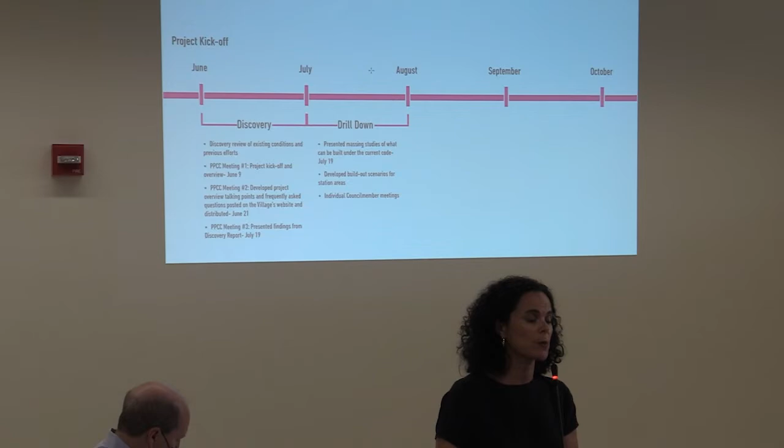Our second meeting, we talked about the project itself and the project messaging. We went through the talking points about the project and frequently asked questions. All of that information is on the Village's website and has been disseminated, so you can get all the information you want about what we're doing, why we're doing it, and the history of the project.

The third meeting, which was July 19th, we presented the findings of the discovery report - information about the work we've done, the existing conditions analysis. We looked at some case studies, good examples and bad examples, and did an analysis of what you can build under the current code. We want everybody to understand the limitations right now with the code as a baseline for additional things we can do, as a jumping off point for where we'd like to go.

We started with the drill down, which is when we actually get into the analysis and details of what we'd like to do, some of the recommendations of testing. So here, these build out scenarios are starting to get down into the details of what you would do if you could play around with different things - the open space, the building massing, the articulation - looking at the case studies and understanding the existing conditions we started with.

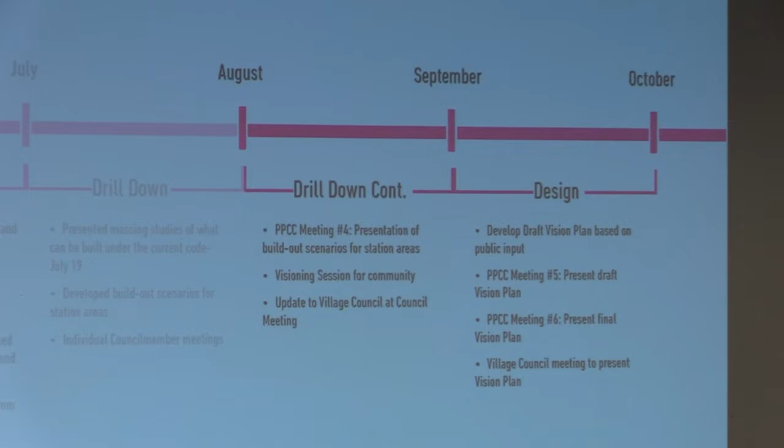If you go to the next slide, we will be presenting our findings to council as an update. We have two additional meetings with the Pinecrest Parkway Citizens Committee following the visioning session - just kind of a check-in on what we learned and where we want to go, the direction. Then we'll be developing an actual draft document of the update to your Pinecrest Parkway Vision Plan, which will go through a draft review and then a final presentation to council.

So all of these meetings are open to the public. It's an opportunity for you to listen and provide input. The presentation is made to the Citizens Committee, and they're directing and guiding us, providing critique and input on a lot of the specificity of what we're doing. Ultimately, it will be their role to recommend the final product to the council for approval.

Oh, I forgot this. Sorry.

The one other thing I wanted to say is that we started looking at overall themes, things that have come up in all of the meetings, some of our meetings with council members, in our discussions with the community. This is going to start to frame how we do the vision plan and the ideas we want to promote. These are things we can talk about at the visioning session as well, and get your input on.

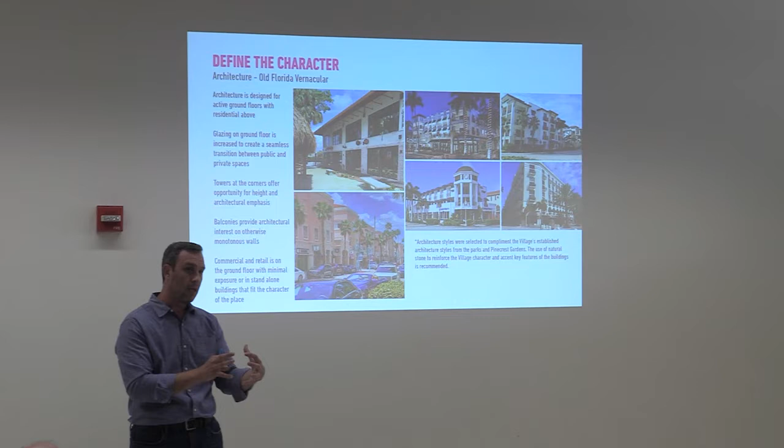Balconies provide architectural interest instead of just a monolithic wall. So that conversation is more about how do we start to break down the box. Step backs, awnings, balconies, those architectural features, similar to this image, really start to make that mass feel smaller, give it some character, and bring the scale down, right? Those are all good things that we like to do from a design world to add interest.

And then again, commercial retail on the ground floor with minimal exposure or in standalone buildings, and it fits into the character of the space. So we're trying to create a critical mass there, that village scale, that village feel with the massive architecture.

And so these are some of the examples that we have. Some of them, again, are commercial on the first floor, residential on top. This building over here is predominantly residential. Again, commercial on the first floor, residential on top. We're also mindful of how many stories or floors we're showing, and we'll get into that a little more, is it 4, is it 5, is it 6, what feels right?

The next, we grouped the Key West and the Mediterranean together. And again, similar to the previous slide, there's a lot of great attributes about this architectural style as well. You can see this in a lot of the architecture in the residential homes throughout the community, so it makes a lot of sense.

And again, there's a lot of great detailing. There's balconies, large overhangs that create shade to promote or maximize outdoor use. Again, large window openings on the ground floor, so as people are walking through developments, they're doing what our grandparents used to do, a lot of storefront watching, looking through the windows, seeing what's in the store, creating a lot of activity.

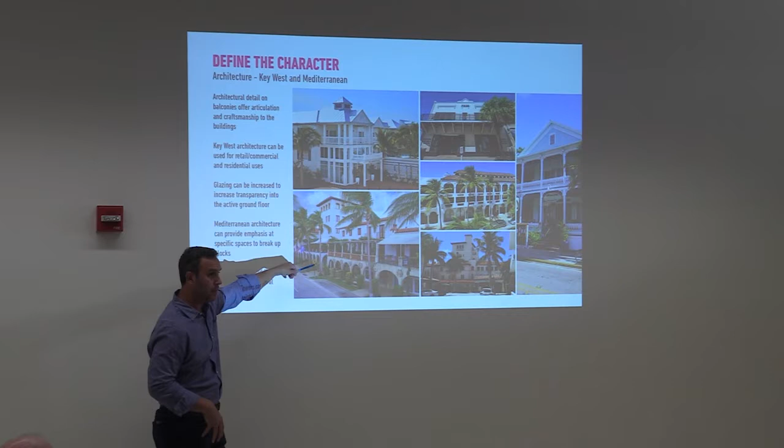And then again, introducing the colonnades, balconies. There's a lot of richness in this photo that this Mediterranean style has, that provides a lot of comfort, a lot of interest, a lot of architectural style and scale to the development.

And then the other idea is, do we want to go with something that's more contemporary? And does that fit? Would that be something that fits with what the community wants as a brand to separate itself from other communities?

And here are some great examples of, from a contemporary sense, a very contemporary facade, contemporary outdoor spaces, and the use of outdoor art to really ground the whole development and define it. There's some really interesting forms, shapes, and materials that come along with contemporary modern design that maybe some of the traditional ones don't have.

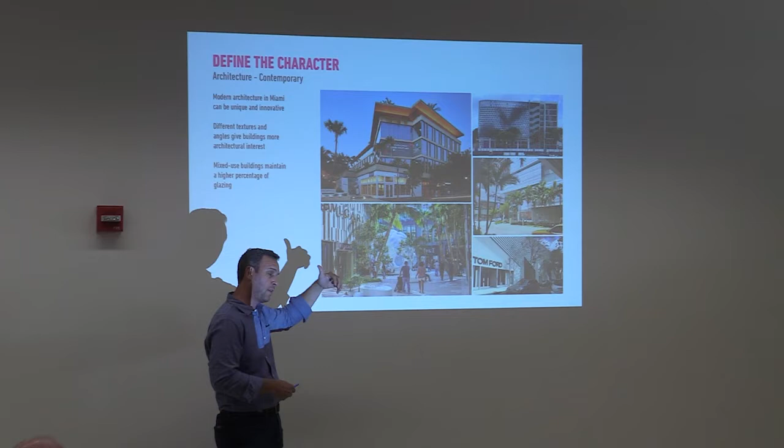And then we start talking about open space. One thing we really want to make sure is that we have meaningful open space, spaces where people can come together. And you'll see in a future slide how we can redefine what open space is. In some zoning text, open space is as simple as a grass strip that's maybe 5 feet wide by 10 feet wide. What value is that really giving you?

Is there a way that we can redefine that, consolidate that, to have more meaningful open spaces, the chance to have more large tree canopy? There's a lot of character in this community, a lot of great oaks. There's an opportunity to really lean into that and create spaces centered around that. Having great streetscapes where there's more green, really invites people to walk the streets and connect.

Park spaces with ample shade give people opportunities to rest and sit out, even on a hot day like today. In shaded areas, you can be 5 to 10 degrees cooler. It would be nice to get people out there.

Placemaking and art add a lot to the character of open spaces. It can be whimsical or more traditional, it doesn't matter. The introduction of art as a placemaking opportunity is really successful and something we need to promote more.

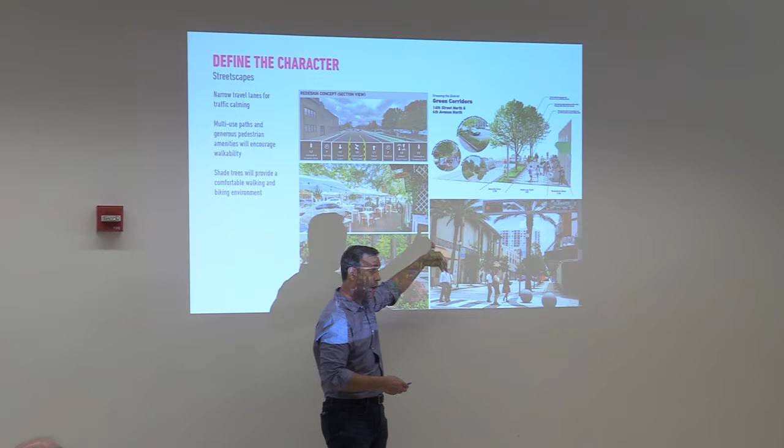These are some examples we've done—different widths of street, on-street parking, bioswales to help collect water and manage stormwater. There's a lot we can do with these streets as we define what they are, adding value to the community and to development.

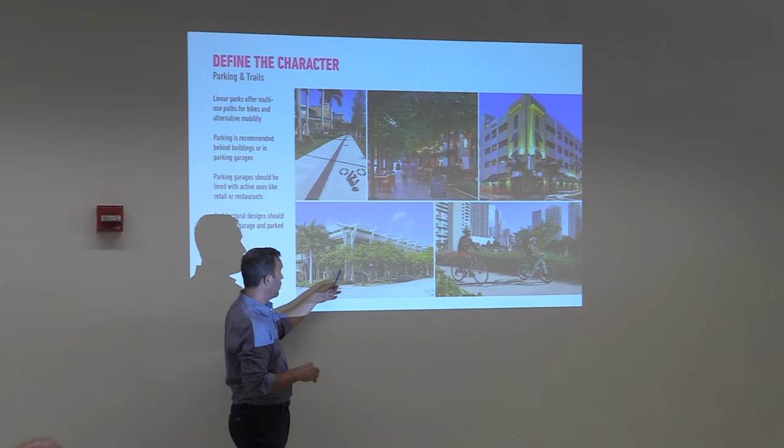Parking and trails—this is another way people can use multimodal transportation to get here instead of relying just on cars. And if they do drive, making sure parking facilities are where they need to be and can serve the community and development.

From a parking garage standpoint, you'll see two examples here. This first one, in Naples I believe, uses more greenery to screen and make the garage structure more attractive. That's very successful—we've seen that a lot.

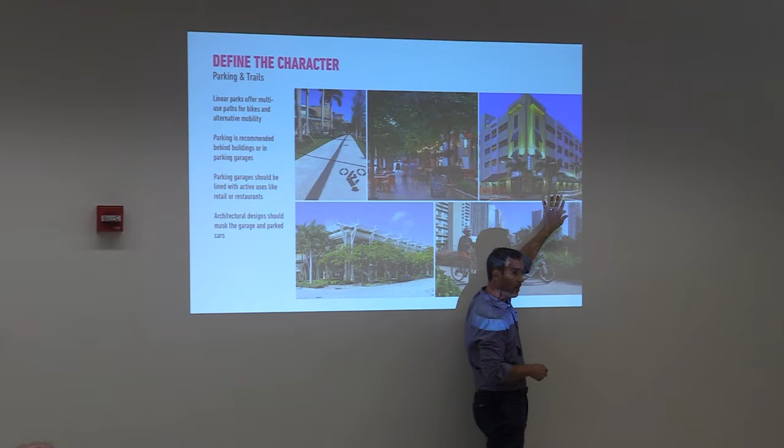The other example is where we either put a liner on the first floor with some retail and commercial, or skin it with residential in front, to minimize the appearance of that parking structure. There are a couple tricks to integrate parking into the corridor to make it much more serviceable for everybody.

Lastly, we look at some of these bike trails—this type of scale I can see happening along US 1, a little bit wider to promote more biking along that corridor. It's not a very attractive pedestrian space today, but we have a very generous buffer along that corridor we can take advantage of.

We can add more green in there and make wider pathways to promote a longer commute for people who want to run, bike, or walk. Likewise, on the backside, closer to residential, we can shrink that down in scale and add more landscape, providing another avenue for people to be connected, but at a different scale since it's adjacent to residential.

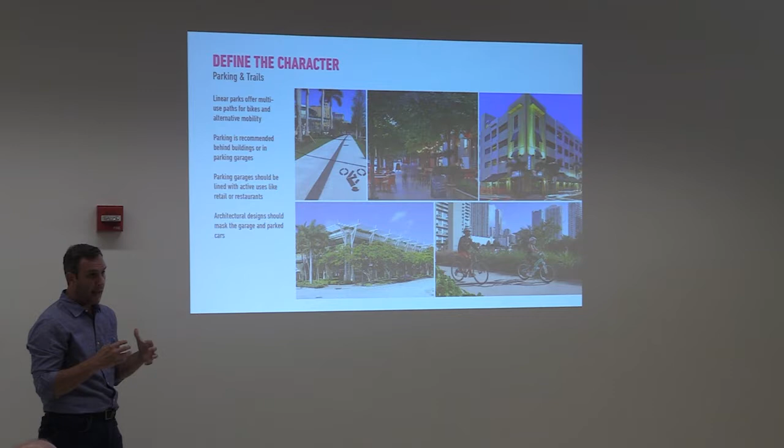And I mentioned the streetscapes again—trying to really take advantage of those spaces and maximize their value as public spaces: seating opportunities, art opportunities, placemaking opportunities, signage and wayfinding, lighting. There's a lot that happens within that environment, so how can we really leverage that to make it much more impactful?

So the next thing we have, and again this was talked about a lot at the last meeting as a lead into this. Currently, the way the code is written, the max FAR you're allowed to have, that's floor area ratio, is 0.73. What our charge is, because of what the county is doing, they want us to look at a minimum of 1.0 FAR. So what does that mean? How do we get there? What would that look like? These next few slides look at what works in your current text today that we don't need to change, and what do we need to consider to allow for that to happen and still be successful with quality high-end development?

Okay, can we have a discussion on the characteristic that we finished? I would like, if we could, because this is a continuation of the last 3 meetings. Yes, they've had this bottled up for a little bit, so let's let them have the opportunity.

No problem, and I think this is going to answer a lot of questions that came up last meeting about FAR and that delta between 0.73 and 1. Because I think the characteristic is very important. But we're going to get to that. I think everyone's concern is density and the FAR. What's the effect of going to the minimum of 1.0 FAR?

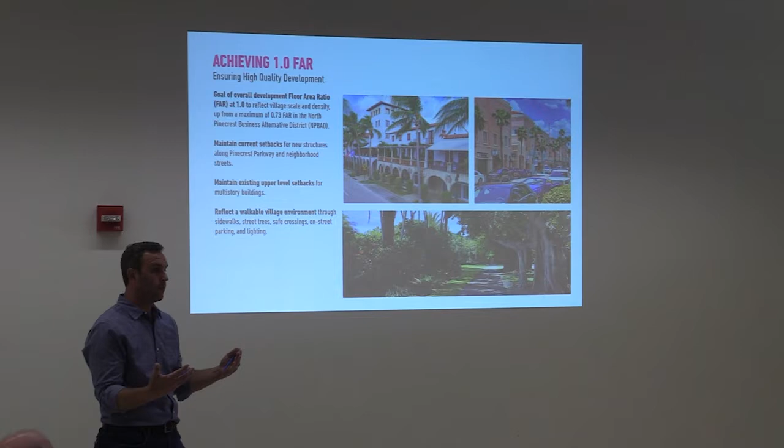May I ask, I'm sorry I wasn't here for the last meeting, I apologize if it was said, but achieving 1.0 from 0.73, whatever it is, does that count the whole village or just the commercial?

It's only the FAR 1. It's only what we're looking at right now are the development districts, so we're looking at South Dadeland right now, 104th and 136th. The 1.0 FAR does not include residential. Residential is excluded from that. The county ordinance asks for a 1.0 FAR basically for the first quarter mile from the transit way, which includes all of our commercial properties. It's the commercial corridor, not anything east of the route.

Okay, one more question. Let me, because we've had a couple board members that aren't here, could you maybe just review for us the transition that exists between US 1 on the front side and the FAR, and on the back side the FAR is less? Just for a moment, it doesn't have to be very detailed.

So based on the county's overlay that they're proposing, at the intersection of US 1 and 136, they would like to see a requirement of 1.5 FAR around the station, stepping down to 0.5. That's within a quarter mile, right? The rest of the corridor, along US 1, there is a 1.0 FAR within the first quarter mile.

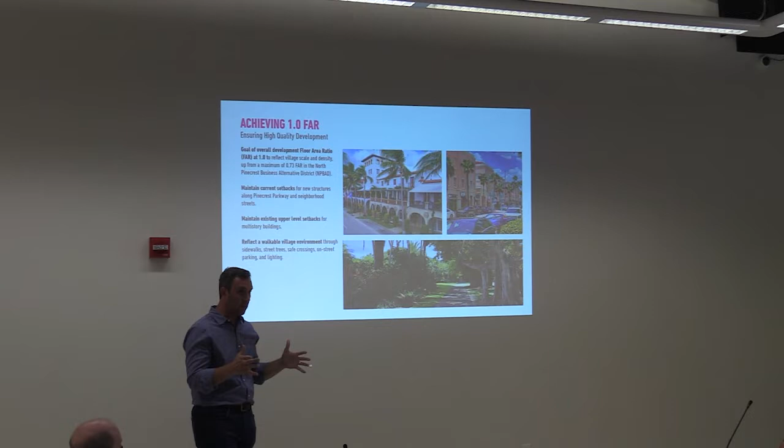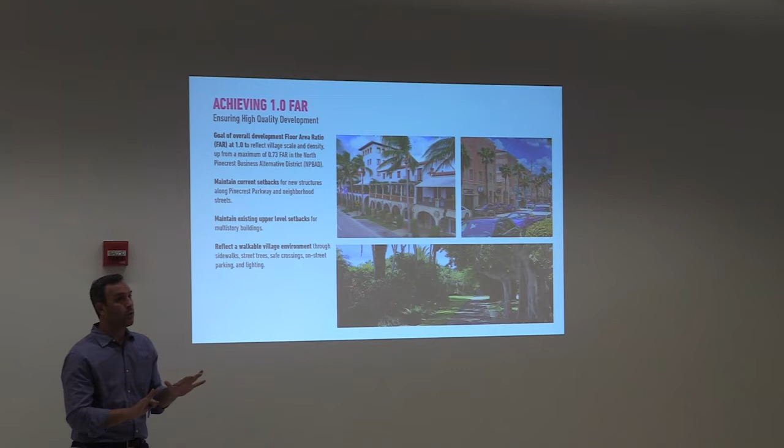In our analysis, when we studied the existing conditions compared to what you see over here on the easels, it was our determination from the existing text that some things do not need to change. The first one being maintain the current setbacks - there's a very clear definition of what the different setbacks off of US 1, side streets, or adjacent residential. None of that needs to change. Those are more than adequate to still have a viable development site.

So we're maintaining those. The second thing we saw is maintaining the existing upper level setbacks - there's language about when you go up to a second floor, you have to step back X feet. You don't need to change that; in fact, we're recommending that you continue that forward. That's good because it helps break down the scale, and it helps make that transition where you have a building that's 2 or 3 stories adjacent to residential, whether multi-family or single family, minimize the visual impact of that.

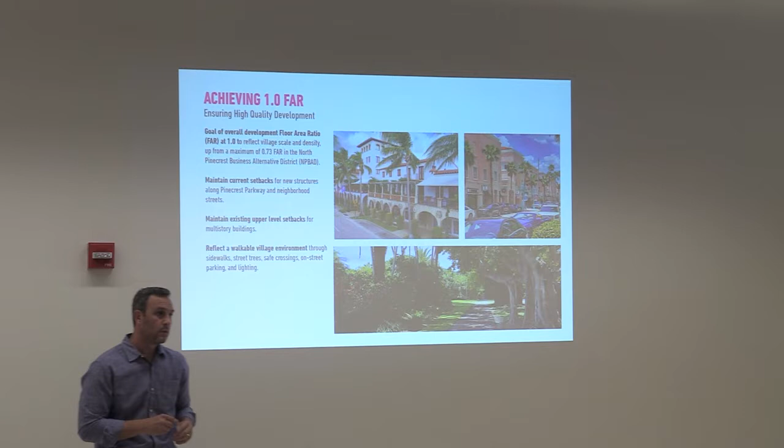The other thing your text really is promoting is a walkable village environment, and in fact we're looking to enhance this even more so. We're maintaining this and actually building upon that, making the connectivity easier for walkability, biking, and other modes of transportation, so that we're continuing that forward. That does not change.

Now, what does change, or what we think would help make this development more successful—again, we're looking to maintain a high quality standard, but still achieve that 1.0. So the first thing, again, I touched on this earlier, is...

Redefining or making more clear the definition of what meaningful green space is. I think that's really important. Right now, there's a range of 10, 12, 14% of open space, depending on how it's classified. Beyond that, it doesn't stipulate what type of green space that wants to be. So one of the things we're looking at is reflecting high quality and meaningful open spaces—plazas, pocket parks, landscape buffers, those sorts of things. Put those in there, require those types of open space uses.

The other thing we're looking to propose is more mixed use. Right now, there's very limited amount of mixed use they can have. So what we mean by that is commercial retail on the first floor, office or retail on the second floor, so on and so forth, so you get a little bit more mixed use within a building footprint.

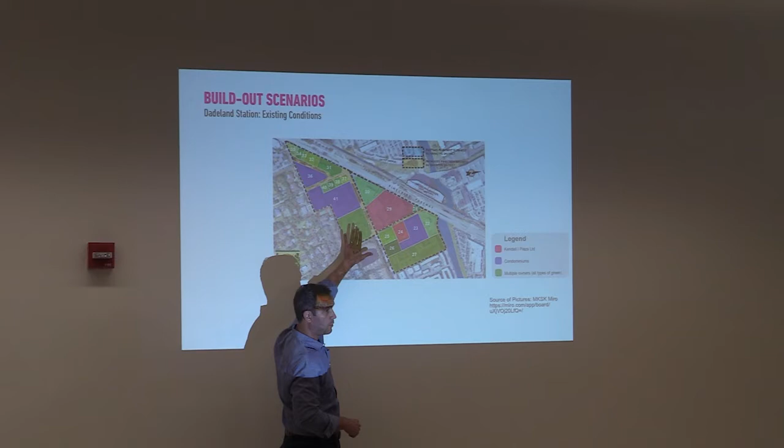So here's an ownership diagram. The orientation has changed, north is to the right. You can see the different owners, condominiums and multiple owners. We stayed away from condominiums and multiple owners because there would be difficulty acquiring that land. For this exercise, we wanted to focus on what would be more plausible for acquiring and consolidating ownership to do these developments, so we excluded anything with multiple ownership.

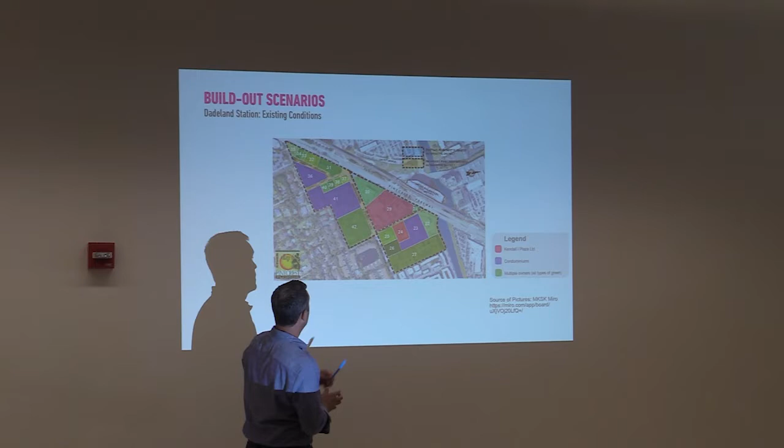Excuse me, to clarify, when you say multiple owners, like number 42, that's not one owner, there's many more in there? Yes. So you don't know how many owners? Each square is a different ownership. 42 looks like some kind of residential or office piece, but is it one owner? That piece of land is one ownership, 42 is one owner. So all the boxes that are green are one owner? No... yeah.

41, 42, 27, 25, and 26, those are all residential. 25 and 26, from what we can determine from the auditor's webpage, those are apartments, so they're owned by a single owner but the tenants do not own them. Whereas 27, 42, 41, and 36 are all multifamily with multiple owners, so it could be a corporation or real estate investment trust, but it's not a condominium, it's not owned by an individual. So there's multiple owners in there, right?

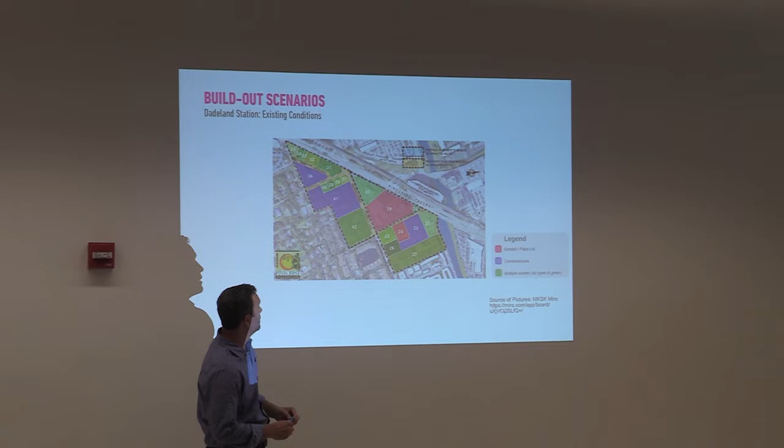Excuse me, but they need to include specifically the exact street number, for example 67th Avenue, and it's not on that chart, so I'm trying to figure out, is this all east of the highway? Yes, US 1, we're east of that. Like 42, what street is that, for example? That's on Kendall Drive. Yeah, Kendall and 68th, yeah. We need to include the specific street. We can have those.

Can you point out the CVS? That might help. CVS is right here with 30. You want to go back to the next slide? So I apologize, we're changing the orientation on this, but orientation is due north. So here's Pinecrest Parkway, here's 88 right here, CVS is right at that corner.

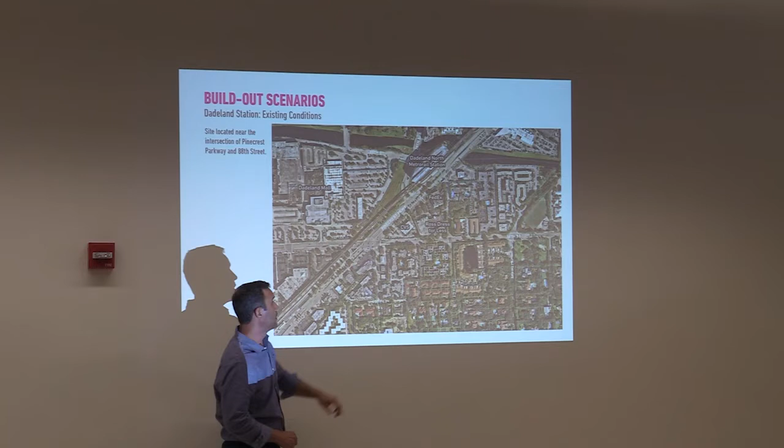So that's number 42, the green one you're talking about? Go to the next slide. No, 30, yeah. So CVS, 42 is right there. 41 is right here, 42, yeah, right there. 30, 36, 41, 42, 25, 26, 27. Point out 88. 88, and then 68th Avenue is the one in the way.

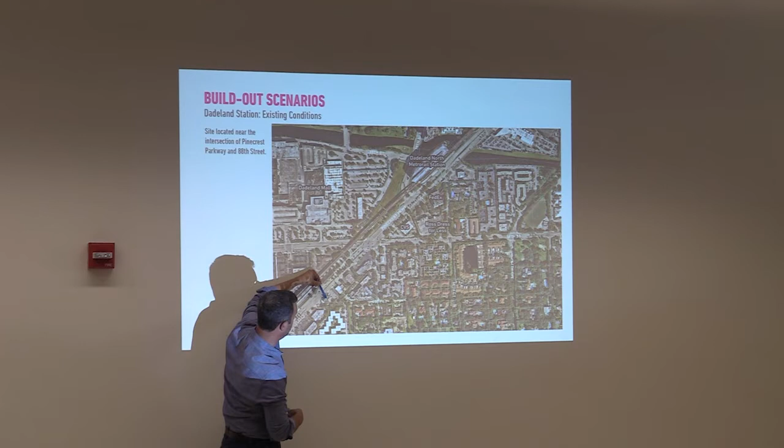Are you sure the existing commercial area is not... this is existing condition. Can you delineate, can you show with your finger where the actual commercial areas are located? Yes, commercial is primarily in this triangle here. There's commercial obviously along the parkway, and there's some commercial in this zone right here.

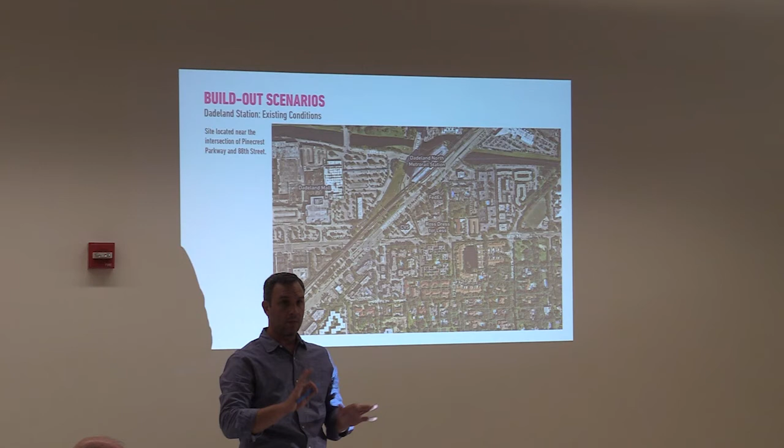Multifamily, multifamily, multifamily, apartments, multifamily. So what is that, you're gonna do away with all these? No, just to be clear. We all know all this. Why are you talking about everything that we already know? Those requirements that it says, because they want to increase the density. You want to show little boxes with it being green? Are you talking about ripping down?

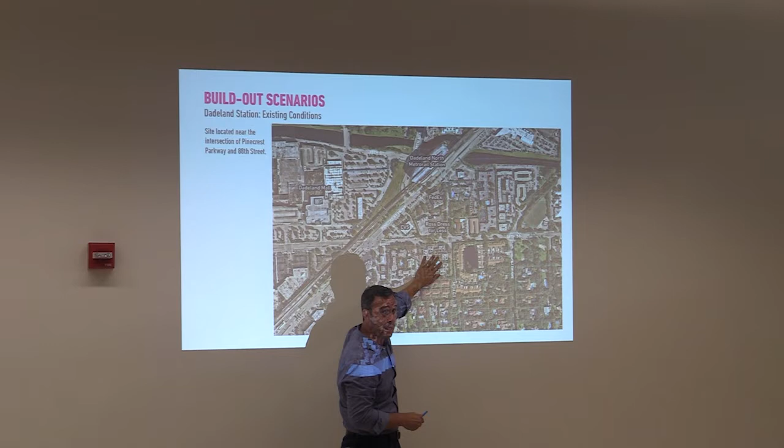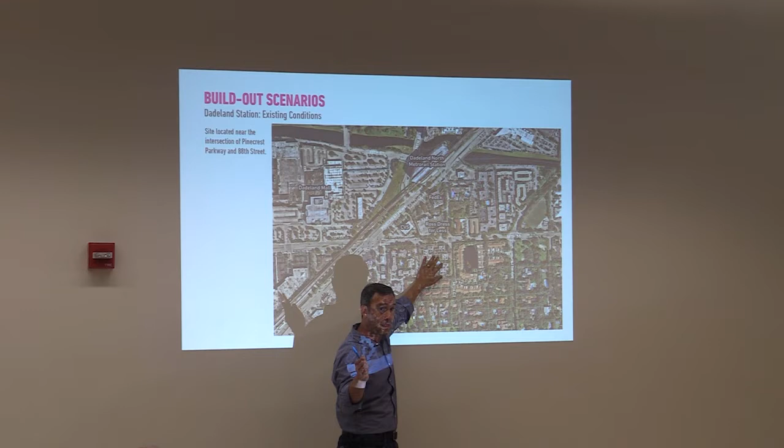No, sir, no. So we're showing those ownership maps, and one thing we're teasing out or looking at to verify is the limits of what these districts want to be. Currently, the way the current vision plan has it, it includes the multifamily development in that boundary. We are proposing not to touch those multifamily and focus solely on the commercial for the purposes of this study. We're not proposing to tear anybody's house down or residential, we're not proposing any of that.

Can I add something? All of this property is privately owned, and every property owner has certain rights as provided within the zoning code of the Village of Pinecrest. So if it's zoned commercial, you go to the commercial zoning district. The land development regulations tell you exactly what uses are permitted, what heights are permitted, what setbacks are required, how many parking spaces are required, and those owners enjoy those rights, nobody's going to interfere with them. What we would propose is to allow, if an owner wants to come along and redevelop in the future according to a plan approved by the Village of Pinecrest, that could be permitted if the plan is put into place for that.

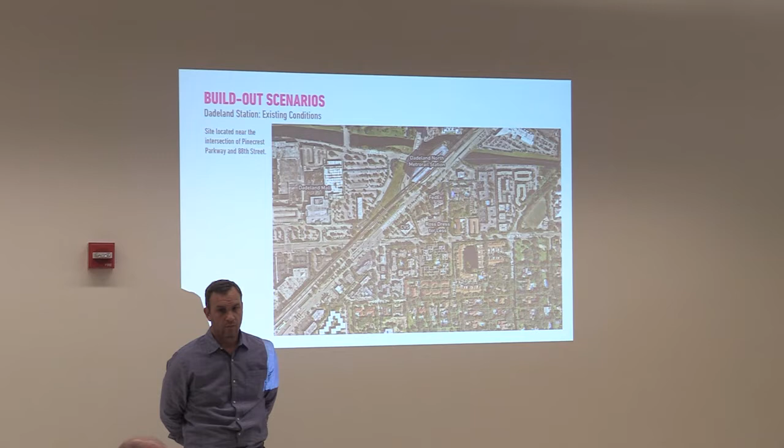We're not talking about taking anybody's property or redeveloping any property at all. That's privately owned property, and a property owner has the right to develop according to existing zoning and any changes that are implemented in the future.

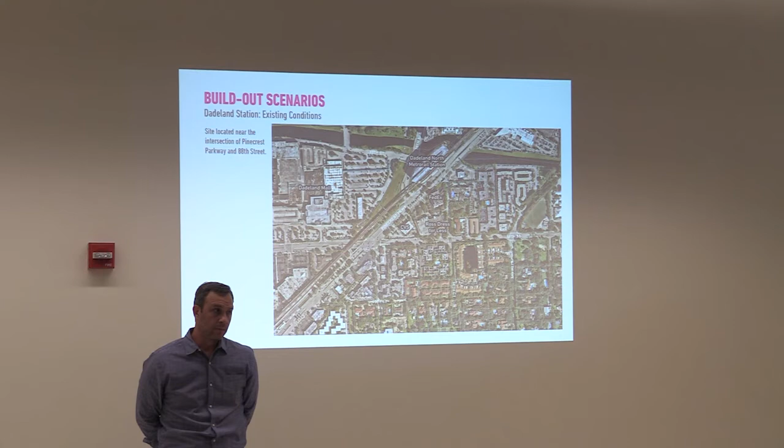So these are just study areas. Yes.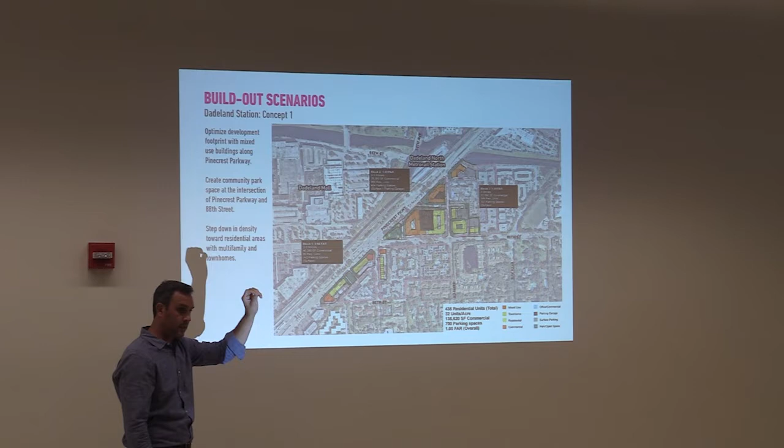As we look at that, the first plan, first scenario we want to share with you, again, is how to achieve a 1.0 FAR on the commercial property only. It's faint, I apologize, the board's a little bit clearer, but there's a pink line that represents what the vision plan currently calls out for this district. Again, our focus is on the commercial, not the multifamily, not any of the residential.

So what we're looking at with this development is open space, architectural massing, introducing street hierarchy - what could we do if a developer came in and acquired all these parcels and consolidated them? If someone came in here and consolidated all those commercial properties, what could they do? Likewise along Pinecrest Parkway. Again, we're not proposing that this is what's happening, but this is how we're able to test these solutions. Overall, this plan represents 435 residential units.

It has 135,000 square feet of commercial, 700 parking spaces split between surface and structure, and it achieves an overall FAR of 1.0. Here's how that translates to the 3 different blocks.

In block number 1, which is along the parkway and includes these townhomes, we're at 0.94 FAR, slightly lower than 1.0. Max stories we're looking at is 2 to 3 stories, with a total of 40,000 square feet of commercial, 80 residential units, and 142 parking spaces, all accomplished on the surface.

Why 2 or 3 stories? Because of the area we have with the open space requirements and achieving that 1.0 FAR. That 1.0 FAR is what's locking us in - it's what's determining what we can and can't do. That's why we're limited to 1 to 2 to 3 stories.

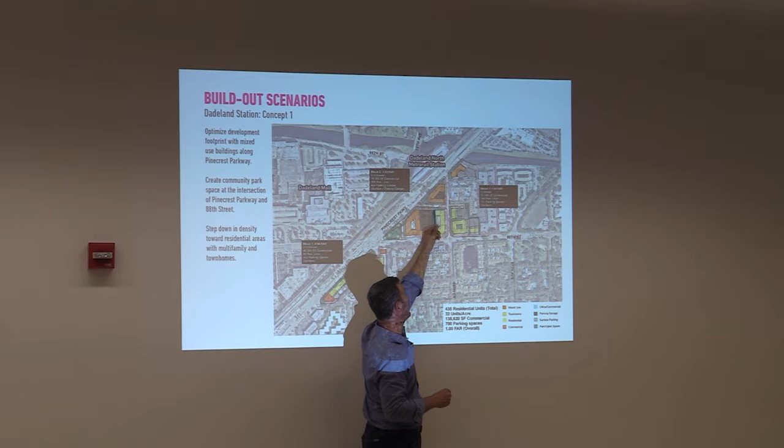Moving forward, block number 2 is the larger block where there's opportunity to do more. We're looking to introduce more district level streets, improve connectivity, and introduce more green space. This green space is fronted on US 1, at the corner of US 1 and 88, to make that a possible gateway as you drive in from the community from the north.

We have a mixed use building here, shown in orange, with residential in the back, serviced by a parking structure. On the north side, we have another mixed use building that has 1 level of subsurface parking and then a modest structure above that. We also have at the very top a mixed use building with surface parking.

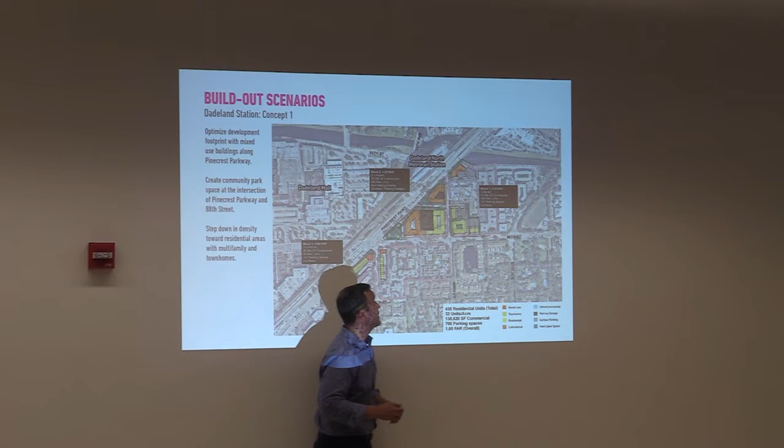For block 3, we're at 1.0 FAR, 3 stories max, with 17,000 square feet of commercial, 149 residential units, and 137 parking spaces, all achieved on the surface.

Matt, currently, if you go back, so when you describe the dwellings per acre, at each one of those, what is the current allowable dwellings per acre?

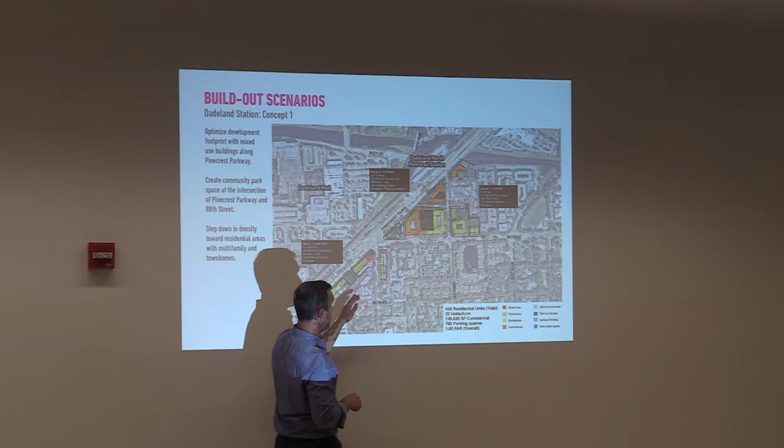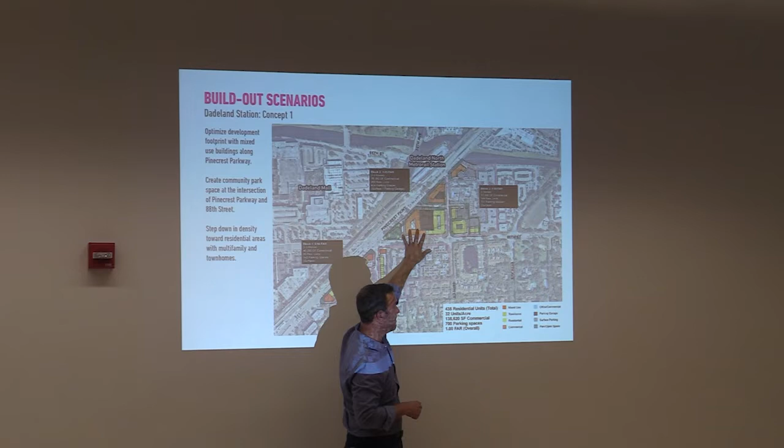So right now, from a residential standpoint, the areas we're looking at, there's only residential on this corner, and it's relatively low. What we're proposing is increasing the density, because there's not residential there currently, but it is less density than what the existing surrounding context is. So while it's being increased, we're not maximizing it, it's slightly lower than that.

So that little square over there you pointed to, that's residential now, the yellow square? You're saying it's zoned commercial, but happens to be residential now? It's residential right now, I believe it's apartments at this point in time.

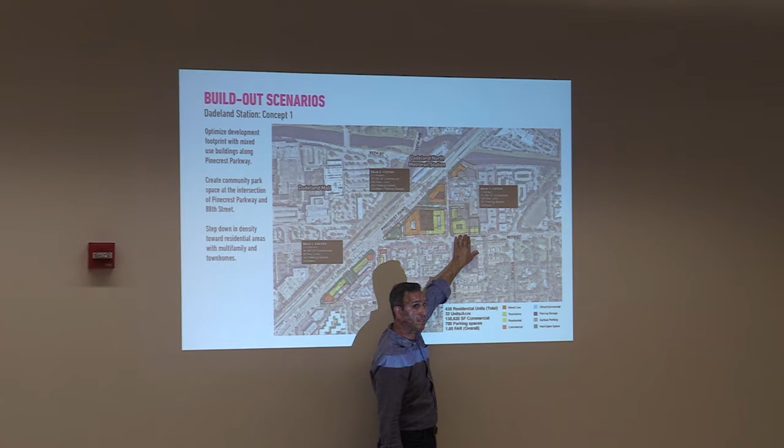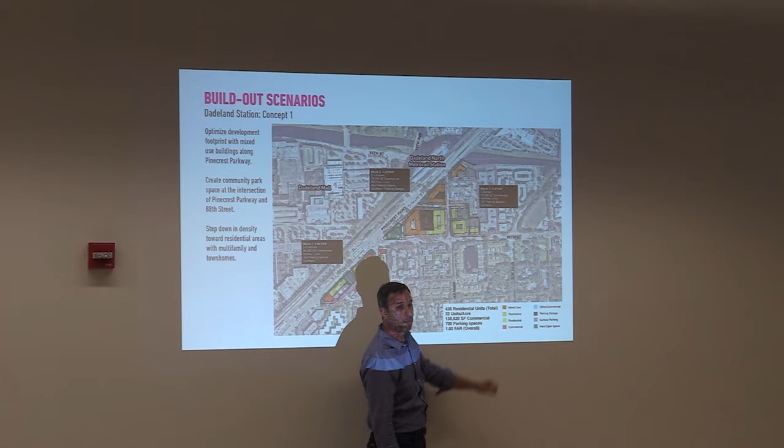Right, but I thought you said you're excluding residential. Yes, we decided to keep this one in there. Sorry for the confusion. We decided to add this because it was a single owner, and if there's an opportunity to maximize or optimize the development to create a better space, that's why we looked at it.

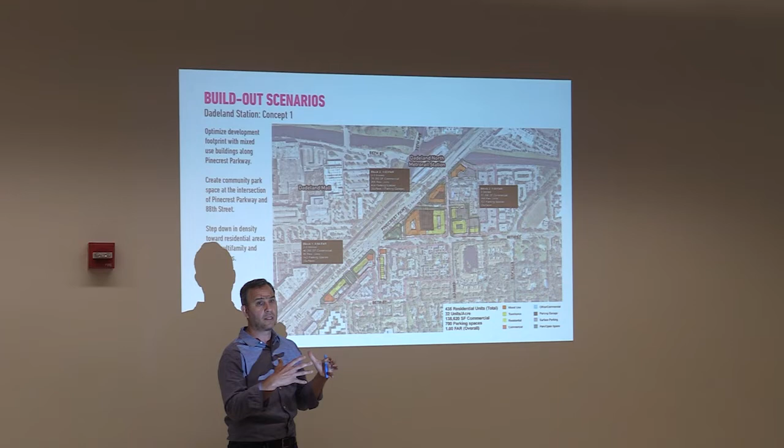So if it's residential, can we lock it in as residential, not meet the 1.0 FAR? Why do we have to change that? You're saying you're making us do commercial to exclude residential? We can absolutely exclude that. This was us taking a look at trying to create as much of a holistic development community center as possible. That can be excluded, we can take that out and focus again on block 2 and block 1.

Again, this is us teasing out different scenarios. Well, I understand that, but what I'm concerned about is that if you add it in, it becomes an option in the future to be changed. Meaning, when you say you're excluding it, I understand that's for your purposes of looking at things now, but what I'm trying to say is, if it's possible for someone to come in and knock it down and put it commercial, is that possible now?

No. Okay, so then we should just move on from the group, right? Then we should lock it in.

I appreciate that, to be clear that you're proposing to increase the density on that particular residential unit. In case in the future that one owner would like to knock it down, he has the ability to build more units where fewer units are currently there. I think that's the question.

We're not proposing that. You're not proposing to increase the density on that? We're not proposing that. We're, in some ways, looking at the worst case scenario, what could someone do, and we're trying to find that balance. But that's the question, I mean, they have the right to do that, mostly. No. And why are we doing it?

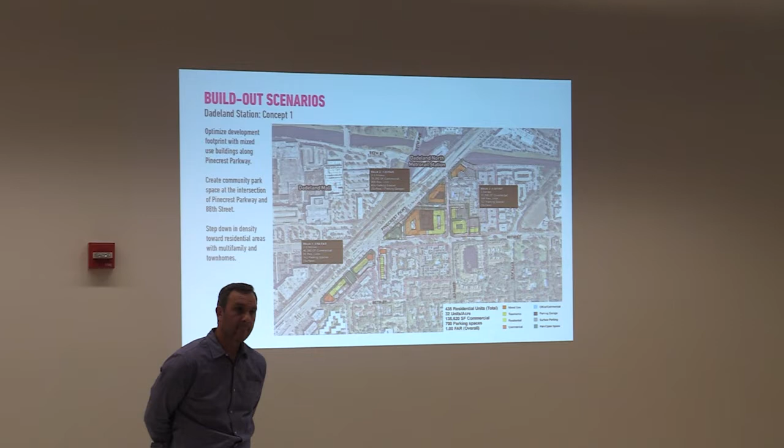From a real simple standpoint, I think the one big concern this community has is density. They're concerned about density. Why don't you talk about the main issue, and then we can talk about everything else under the sun. But let's get to the density issue.

I heard you say a minimum of 1.0 FAR, minimum, and I heard our zoning director say 1.0 maximum. Please define if it's minimum or maximum, and if it's minimum, what is the maximum? Can we go to 10.0?

So let's clarify that. Steve, can I answer for you? Yeah. The Miami-Dade County minimum is 1.0. The Pinecrest maximum is 1.0. I don't know why that is confusing.

We're talking about the county, we're talking about the city, because the county has the ability to impose on all municipalities certain things. The statement here is that the county minimum is 1.0 FAR, and Pinecrest has decided their maximum is 1.0. Well, the minimum is 1.0 in the ordinance that was passed at first reading by Miami-Dade County. Correct. Right now, the village's land development regulations allow a maximum of 0.73 if you have a 4-story building. But we don't know what the village council is going to do in the future. Presumably, they're going to have to comply with the 1.0 minimum.

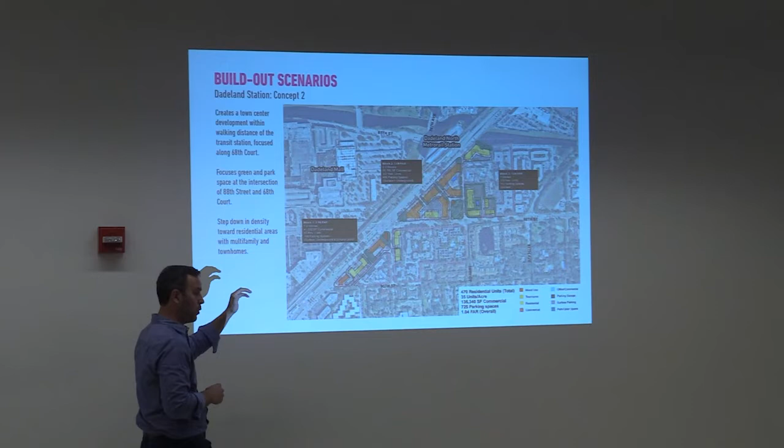Let's go ahead. So the next scenario we're going to look at, again, what does it take to get to 1.0 FAR, but what can we do from a development standpoint that is more context and village friendly, for example. So again, the biggest change that we're looking at here, 1.0 FAR, that's what this scenario is saying. Achieving the 1.0 FAR is relatively easy. Not only that, but overall the stories are relatively low: 1 to 2 stories on block 1, 2 to 3 on block 2, and again 3 stories on block 3.

The biggest thing we're looking at here is where do we want to put the open space. Do we have enough connectivity from the roads? Do we try to rearrange the building masses to make it feel more part of the context?

In this one, we're looking to introduce more meaningful open space on block 1 that could be shared by these uses, mixed use and residential. This does have underground parking associated with it, but also ground level as well. So on block 1, there's 41, almost 42,000 square feet of commercial, 93 residential units,

and 158 parking separated from surface, underground, and ground level. Block 2 is probably the biggest change, where we're taking the gateway green open space that's at the corner and moving it back to engage more with 88 and 68, so these multifamily developments have more direct access to that. We're trying to create a center here instead of a center there, and seeing how the architecture and the roadway network would respond to that.

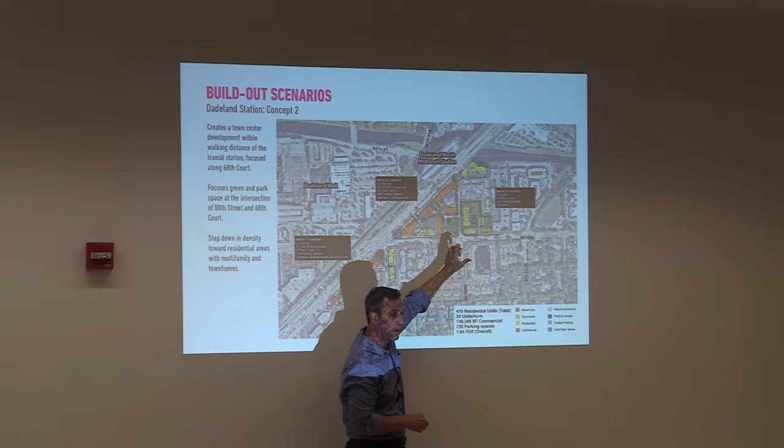Similar to concept 1, we are looking at replacing the existing apartments with townhomes and also multifamily, again a different mix to help bring some of the density down. It also helps step down more appropriately, perhaps, to the context.

Scheme 3 looks at a more inward focus as far as how we develop this with green space and open space. Again, overall we're actually slightly less than the 1.0 — we're at 0.97 on average for these 3 blocks.

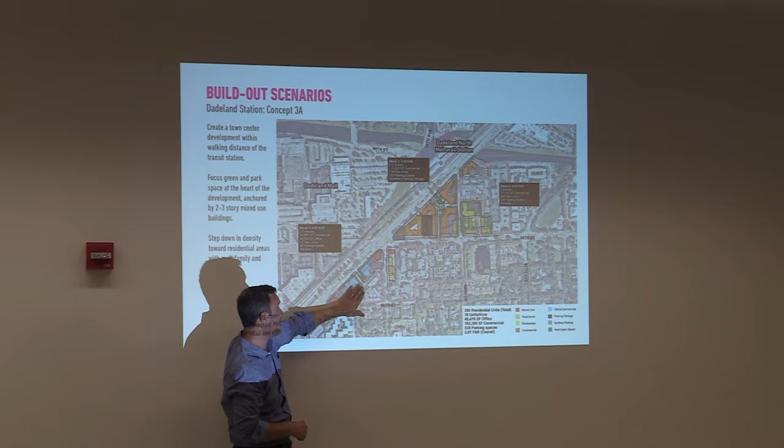With block 1, again 2 to 3 stories, 62,000 square feet of commercial, almost 50,000 square feet of office. We've introduced some office into this block — that's a change. 12 residential units and 89 parking spaces, all done on surface. In this block, we've taken out the residential that was along Pinecrest Parkway and put in office, and the residential we have here is predominantly townhome development.

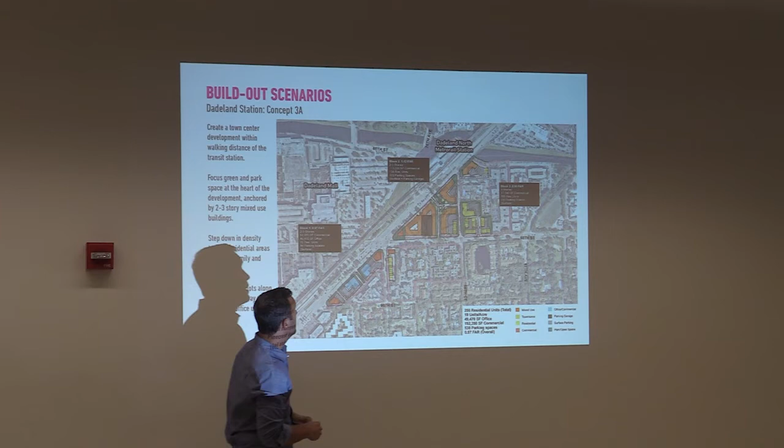On block 2, this is again 1.0 FAR, 2 to 3 stories. This block in all 3 schemes so far has been around the 2 to 3 stories height. 113,000 square feet of commercial, 136 residential units, and 320 parking spaces, again both surface and garage, with the garage located right off of 88.

Likewise, in block 3, we've introduced more townhomes, trying to be mindful of the density, trying to bring that down and have it fit a little better with the context. So 3 stories here, 17,000 square feet of commercial primarily up at the top corner, 108 residential units and 130 spaces, all achieved on surface parking.

The last one that we have, because we wanted to look at, well, what if we go higher, right? Because everything so far, especially on block 2, this is the focus. What if we go from 2 to 3 stories to 4 to 6 stories? Try to get 4, 5, 6 stories in there.

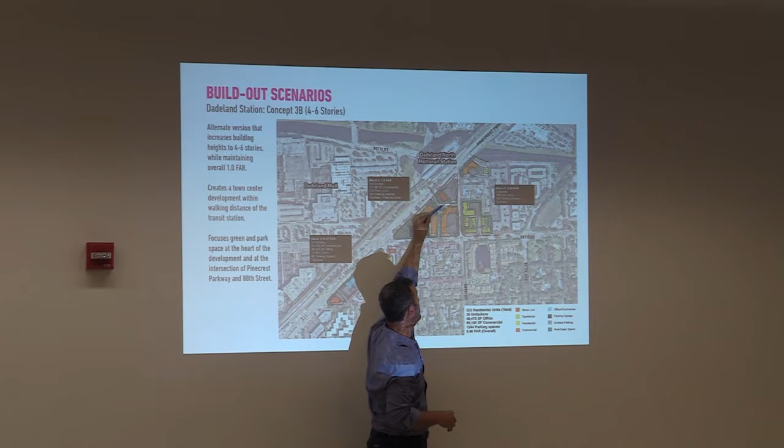As you can see, as we go higher — these are mixed use and these are standalone 1-story retail spaces — you see a lot more green. We still need a parking structure to be able to service those. We still have an internal green space with new street typologies introduced there, and a little more surface parking on the back sides of both of those.

So the big takeaway on this plan is what's the impact of going higher but still achieving that 1.0 FAR. Again, that's the trade-off, right? You can go higher, you can get a little more space in the ground plane, get a little more green, probably increase some of your buffers, but your buildings are taller.

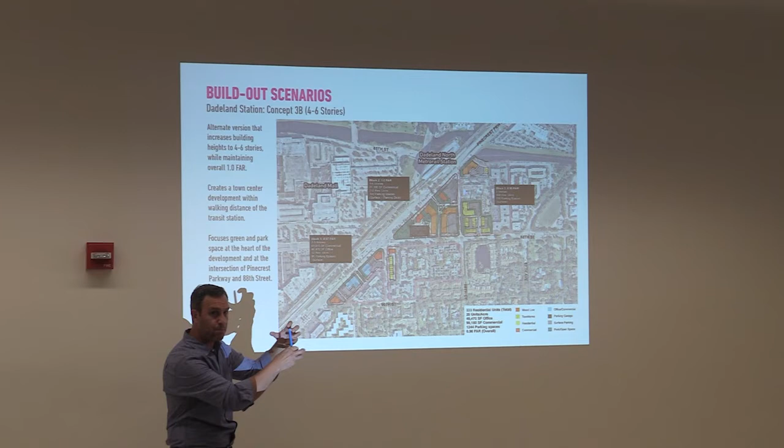So I think that's a really interesting conversation for us to tease out and understand — does that make sense? Or do we need to be more in line with the 3 previous schemes, where we're a little bit lower, have a little bit more fabric, a sense of village scale, and more spaces, that sort of thing? What's the priority?

The next piece that we're going to look at is the 104th Street station. So Pinecrest North is this way, 104th is right here, and Flagler Grove Park is right here. We're going to be looking primarily at this portion here.

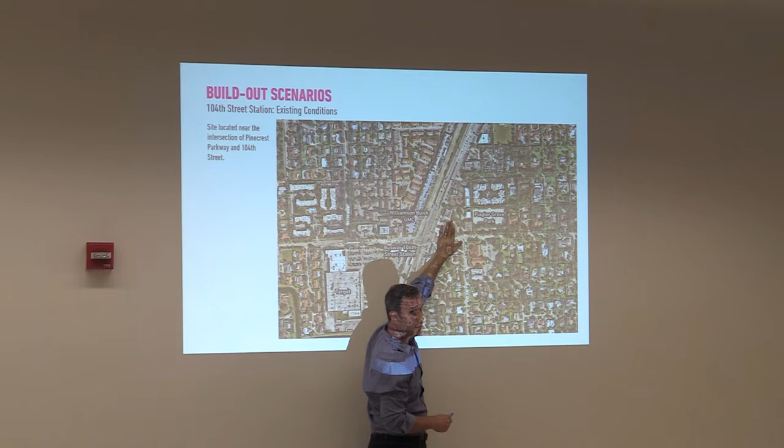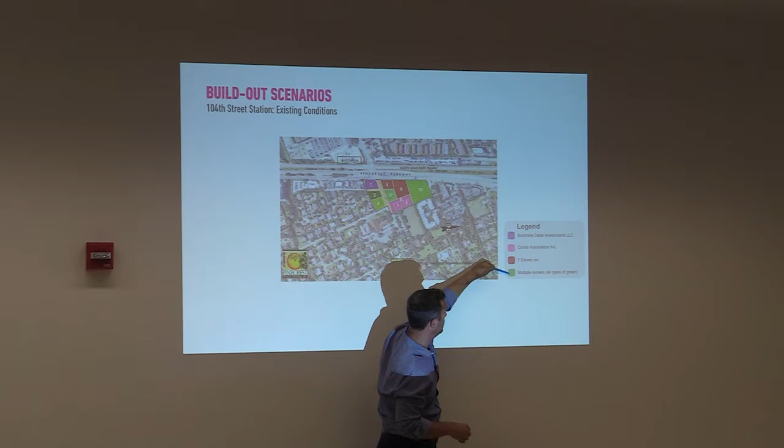Today, again, north is to the right with Pinecrest running east-west, and here's 104th. So you can see who owns these properties. There's a condo association, there's also some multiple ownership, a 7-Eleven here, and Sunshine Date Investments there.

Again, north is back to the top of the page. 104th is here. Most of what we can do is on the north side. There isn't much opportunity on the south side, just because this building looks like it's recently renovated, so it doesn't make a lot of sense to recommend any changes to that. It looks like a great renovation, but there's an opportunity to capitalize on this corner a bit more than maybe a gas station. So that is represented in block 1 here, with 2 stories, 10,000 square feet of commercial, and 18 parking spaces.

I think you need to look into that area, into that block, because I was doing some analysis there. Basically the commercial—because we need to have both healthy residential and healthy commercial—and I don't think the commercial there is surviving very well, because I think they need parking. I see an encroachment into the residential area, and I think we really need to analyze that block in more detail, because there's a need to expand the commercial area.

So this is on the south side? Right, our limits to the south are right here, as far as what our study area is. All of this is residential, but they are transitional, because the commercial area is invading into the residential area. Are you speaking of along here on the border? Right, we need to analyze it a little bit in more detail. I think you need to recommend maybe some zoning change. Okay, we can do that, we'll look at that.

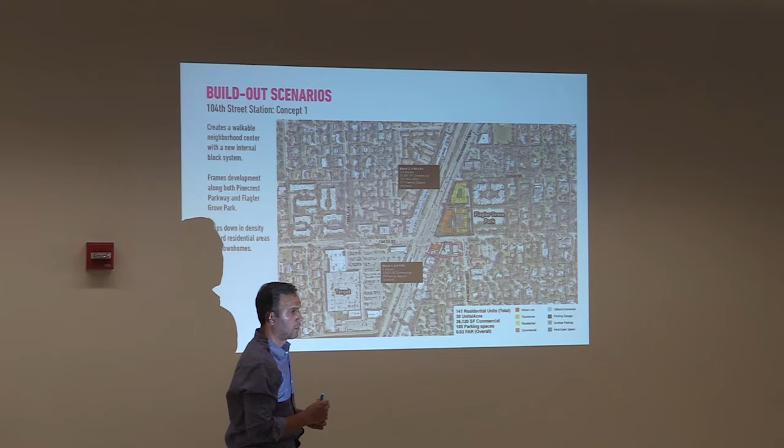That's a good question. We want to get feedback based on these concepts, not only for the vision section, what's next, but as we get into design, where we will start representing these ideas more in 3 dimensions—so people can start to get the feel, the scale, the step back of the building, the heights of the buildings, the quality of the open space, and how they relate to one another. We intend to do it for all 3 areas we're sharing with you today.

So these 3 districts—I think that would be nice, because then people can see what impact this floor area ratio is going to have. We agree, we're trying to have a process here and stick to it. I think the public has a concern because people are beginning to understand 0.73 and 1, so we have to show them: hey, if we do this, what's going to happen to the transportation, what's going to happen to the parking, what's going to happen to all these kinds of things.

That'll give them the characteristic, not the style of architecture. I think that's very important. The style is a little hard to pin down, but you can start to get the feel for the type of development, the scale, the spaces, the quality of spaces. That's our next step.

Can I interject? There's been a lot of focus on the 1.0 FAR because of the county's RTC ordinance they passed at first reading in June. But the charge and responsibility of this committee is to look at the entire parkway. You have to take the county's ordinance into consideration, but it's to develop a plan for the entire corridor. I think what Mr. Manda is showing you is how you can achieve the 1.0. But it's possible, and maybe it's not something you'll recommend, but maybe at 136 you allow for a higher FAR, lower FARs elsewhere, maybe higher at 136, and maybe it's less than 1 overall.

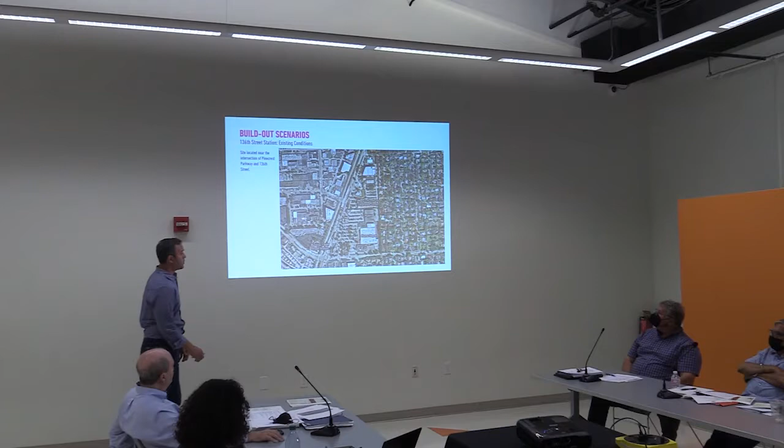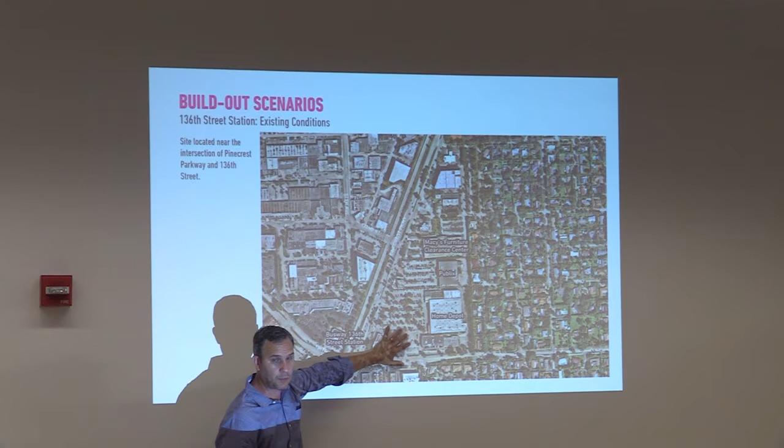The last piece, and the reason I wanted Stephen to mention the community urban zone, is that there's a station planned right here. So there's a big bubble around this area which would designate it as the community urban zone, where at its core, as he mentioned, it would be 1.5 FAR, stepping down to 0.5 as we move out. So unlike the previous two areas, this one has that wrinkle—that overlay. However, we think this one could easily accommodate that because of the amount of space we have. The opportunity here is much greater to really create that town center, urban core, if you will.

I think everybody's familiar with this—this is the Home Depot, Publix, and Macy's, right? And then there are various out-parcels, commercial, as you go north.

For the sake of our study, we are basically going from 136, obviously the Pinecrest, to this western edge of the residential, all the way up to basically south of Sunnyland Park.

Matt, I think it's very important that the urban zone characteristic be built with the overall scheme, because otherwise what's going to happen is you're going to have piecemeal things going on, and the confusion is going to be in the traffic congestion and some of the other things.

So is that going to happen given the urban zone right away, or is that down the road, time-wise? Time-wise, they're going to examine the rest of the corridor in this process, especially in the visioning session that they're going to have with the community, so you can sit around the table and say, I'd like to see this here at 136.

Let's make sure we have a buffer here. Let's not go any taller than 4 stories here. That's all going to be a part of the process. Today, they're just focusing on these areas.

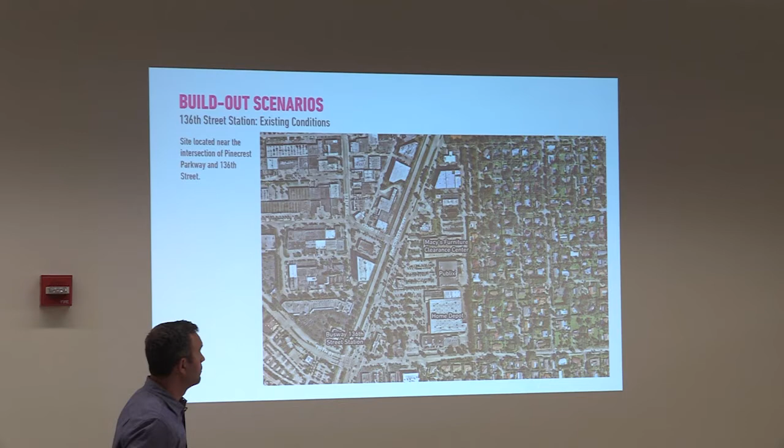No, because there's been so much conversation. I'm not questioning. What I'm saying is that in the scheme of things, if you do things in piecemeal fashion, our city is going to fail down the road. So the main characteristic has to be an overall scheme that has to go in.

I expect that's in the next slide. Conversations about incentives to kind of promote this type, that's another conversation. That need depends on discussions with the developer. The developer will decide which way he's going to go, because I don't think the city is going to finance all of this.

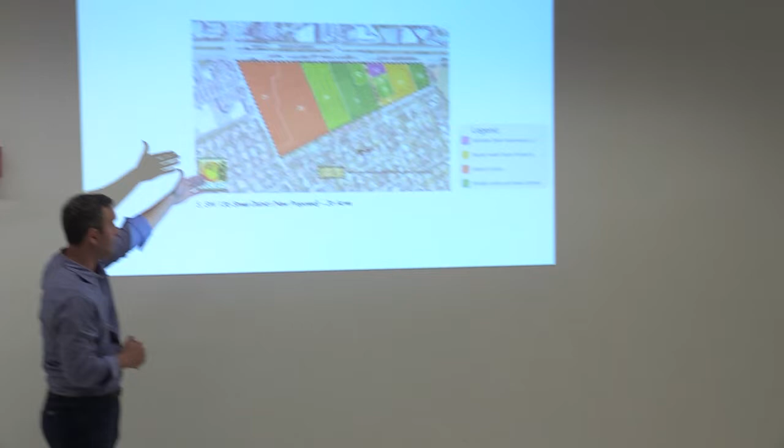Next slide, again, just the property ownership, again north is to the right of the page. There's multiple owners in here, but this is primarily all commercial, no residential. So there's the opportunity to acquire, if a developer were to come here and acquire all this land, to do a really impactful development. So what would that look like?

Again, there's the opportunity here, if you were to consolidate this, to really create a town center. Obviously you have the falls over here, which kind of serves as this, but this could take on an entirely different character. So one of the questions we started to ask ourselves: if this could be the heart, could be that downtown if you will, is it better to front off of US 1, or would it be better to front off of 136? So the second plan we'll show you shows that.

So this one has its focus off of US 1, creating that gateway off of US 1 where you come into this rather decent sized community space that has retail and even residential fronting on that. We're also providing a new main street here coming off 136, so it's easy to get north-south through here.

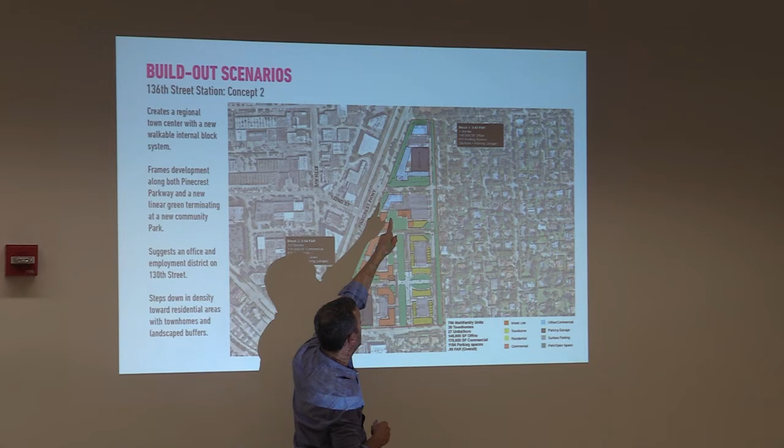Again, 3 to 5 stories here, so this is a little bit taller than the last one. 5 stories would be out here along Pinecrest Parkway, and we'd step down to the lower levels. The office is still at the top, but in this scheme we're only at 3 stories instead of the 4 to 5 in the previous one. Just playing around with different scenarios as far as density and height.

All of the setbacks are current setbacks, we haven't changed any. No change. So that's a given in all the plans you show. It's a given in all of those.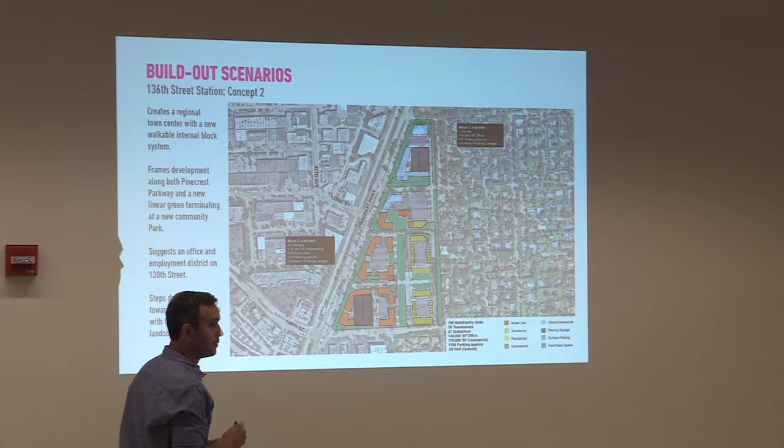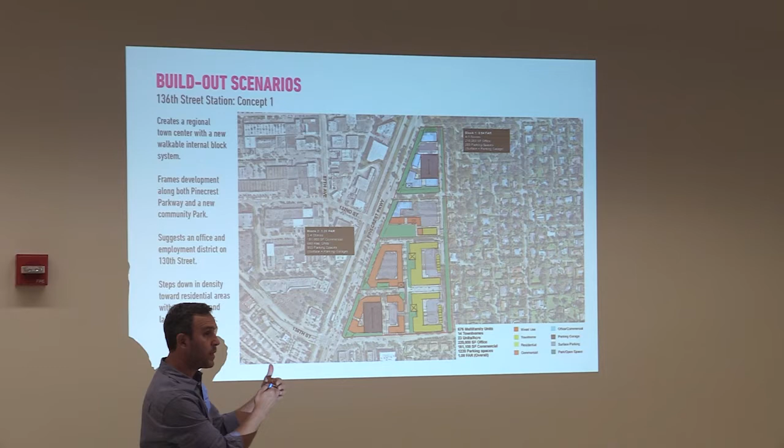I asked you a question earlier, the percentage of green space you're showing here, is it the same as in the other illustration, or has it grown in this one? I don't have the exact number, but I'd say it's probably comparable. However, in scheme 2, we try to push it a bit more to get more green space to create that differentiation. This is green in concept 1. Concept 2 obviously has a lot more green, more block or neighborhood green opportunities.

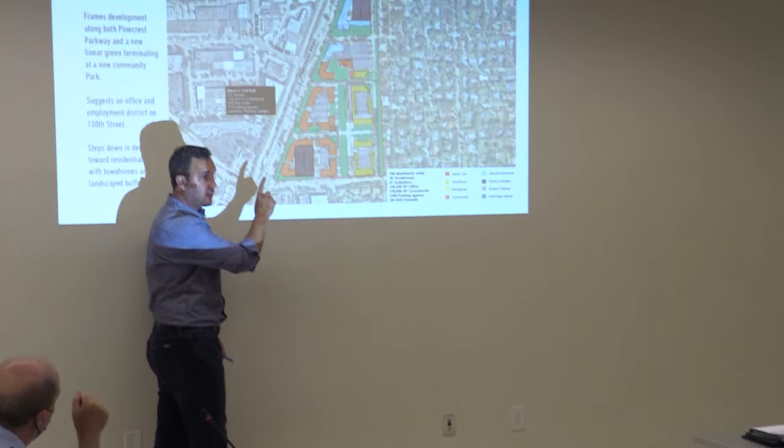Again, in both cases, you're stepping the residential side down as you're moving towards US 1, high to low. So if I were to ask you where the quarter mile is that comes off of the corridor, where does that fall into this? I think it's the southeast corner of that property, pretty much. But again, I think we need to overlay the urban community zone as it associates to that.

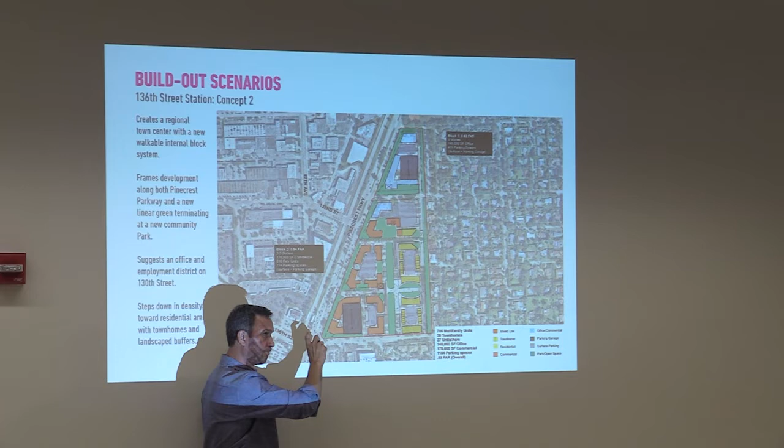So the mix of FAR, how we step down, could vary block by block. That quarter mile, we need to double check this, but I'm pretty sure there's a different requirement we need to follow here as opposed to the other two. Yeah, the quarter mile, I think it's approximately a quarter mile to here. But all the residential is excluded from the RTZ ordinance.

And that green strip along that vertical line, is that just grass, or oaks and landscape and so forth? That could be primarily a buffer that's heavily planted to screen as much of this development as possible. There's plenty of room in there to put multi-purpose trails, to promote connectivity so people can run, walk, and bike through there as well, so there's a lot of opportunity with that.

That should be developed, because just putting only green will not cut it. You need some trails and pathways and walkways so people can engage. We've got 18,000 people living here, so that could be a great opportunity for them to use it.

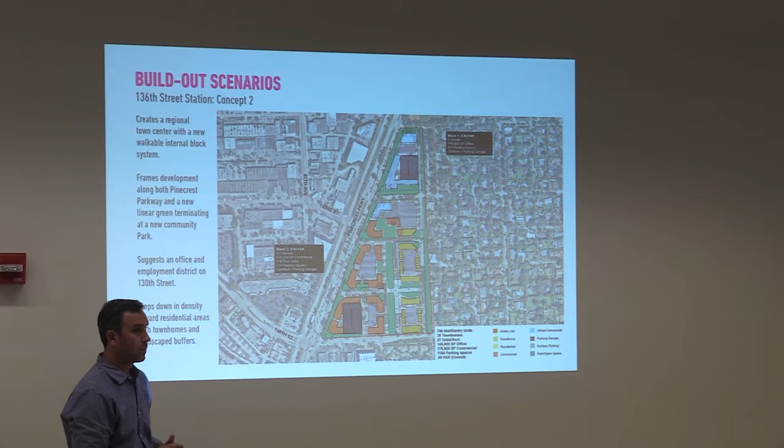I was just going to add, so just to give us a little scale, this is a diagram - that green bar that goes all the way up, what is that, a mile, half a mile? If a quarter mile is where you pointed, that path going all the way up, I would say you're probably slightly over half a mile. I do have an aerial photograph.

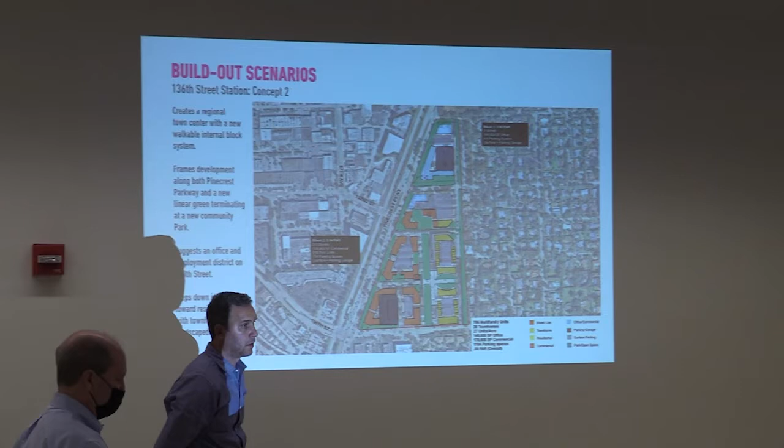It goes from 136 to Suniland Park. So you can see the ball diamond, the skin right at the top, so you T right into it. I just want to make sure that I could walk that and I wouldn't get too tired.

It's still a lot. So just to confirm, I have an aerial photograph that shows the area. The quarter mile pretty much parallels US 1, and it goes like that. But all of this is excluded, so this is included, and all the other commercial is included.

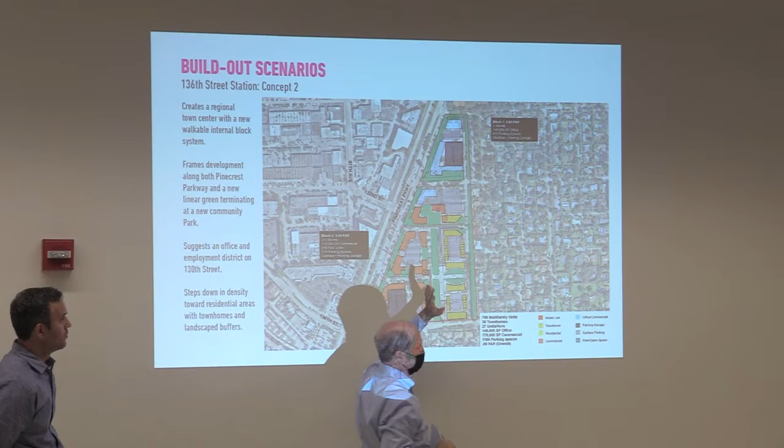So once again, what road exactly is the far right green, for example? Give me a ballpark, what's the name of the road or the alley?

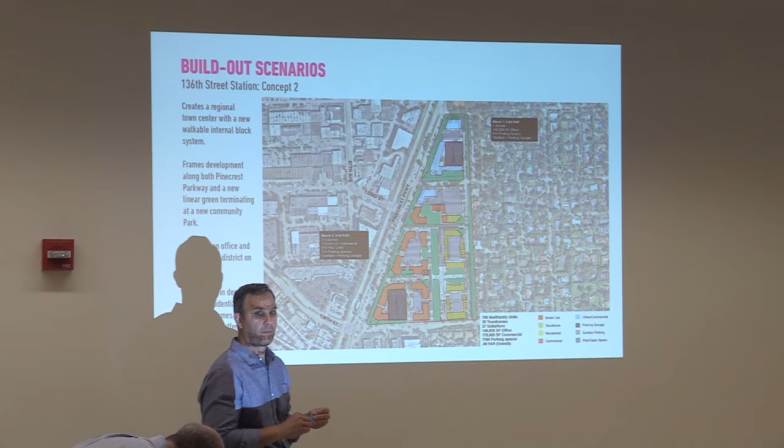No, it would be the back of the Home Depot right now. It's the back of the Home Depot. Yeah, the back of Home Depot's right there. What number is that? It's not a street lot. It's the back of them. It's the alleyway behind the Home Depot. Right now, that space is primarily service for all the big box that's happening there.

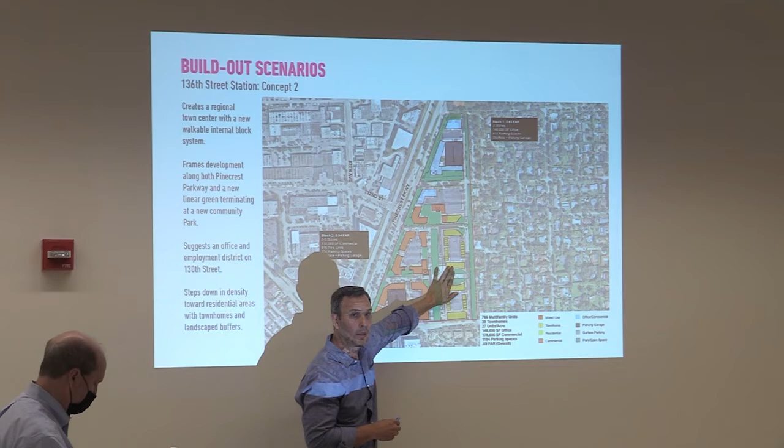No, but I think it's Southwest 84th Avenue, no? No, I don't think it has a name. I think it's just - there's no road. I'm sorry, what's your- yeah, no, but it's just service. I live right there. Yeah, it's close to 84th, but it's not 84th.

Actually, if you go two steps before, you had the Home Depot there and the house and everything. But I think the main point the city is making is that same thing. So there's no street here today.

I know, but it's access to the Home Depot. Yes, they're actually- I can't hear it. They're adding, they're behind, they're the loading docks for all of it. Yeah, it's all service. It's all back of house.

Like a celebration. But I think it's really important to have a secondary pedestrian thoroughfare separating, because we have opportunity along Evelyn Greer Park. We have opportunity along Suniland Park to introduce a pedestrian way. So we do have that opportunity in some areas that the city has control over to continue that.

I would even add that it should be wider so that people can use it. It should not be like Mickey Mouse, little halfway.

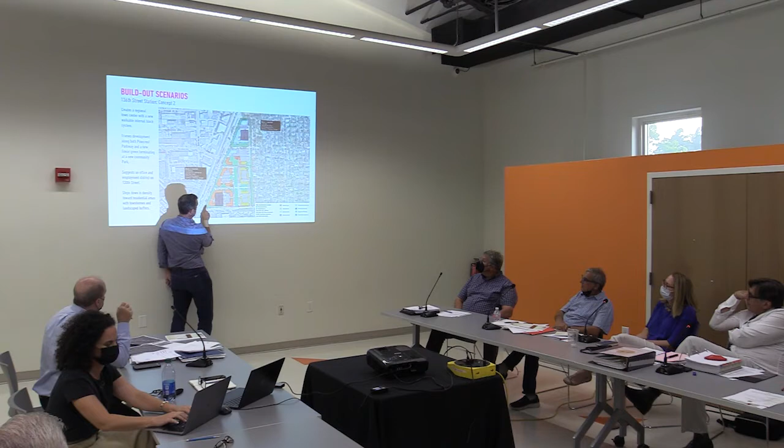So what I read in that is that there's the green buffer, and then there's a small street that goes alongside, is that right? So this is 20 feet wide. This is comparable, so you have another 20 feet on the backside here. That's pretty sizable. This street is sized to have two-way traffic and on-street parking.

So there's opportunity here, if you don't want to have on-street parking, you can make a multi-use path on one side and parking on the other. So there's a lot of flexibility built into that to create the connectivity that we want, or to enhance the buffer, or to create essentially a linear park that would connect you from 136 up to the park.

I think the linear park would be very nice. The public can use it. I think there has to be enough movement to where there's some security, because if it's dead space, then it becomes dangerous.

On the second block, facing US One, what is what you have inside the building? You have like a courtyard? Are you talking about this block right here?

No, from 136 facing US One, the second block. What do you have inside that block, in between? Is it a courtyard? Is that courtyard?

This is shown as surface parking, and we've had actually a lot of conversations about that. The other thing that you could do is put a structure on there so you have an amenitized deck over top of that.

No, definitely, you don't want parking there. Well, it's a public parking lot right now. No, I know, but I think that it would be better to have amenity, pedestrian amenity.

Yeah, and I think that's a good question, I appreciate that, because there's conversations about subsurface garage. Do you want to, could you do that? Or do you do structure parking where everything's above? I think, you know...

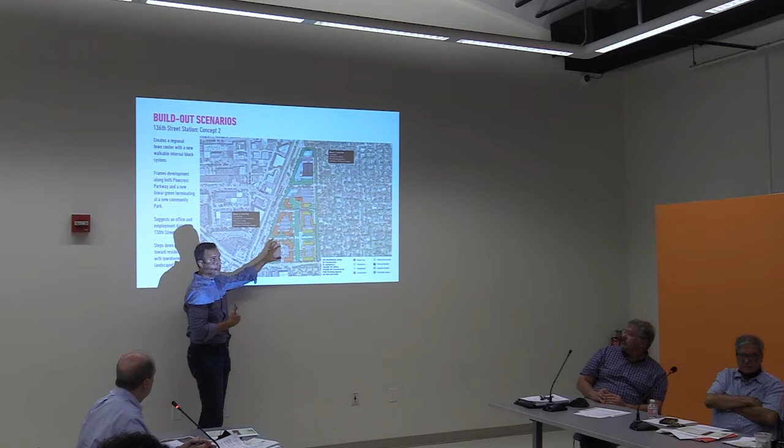Our thoughts at the end of the day, with whatever happens here, regardless, if a developer was able to purchase and do this whole thing, they're going to have to do a traffic analysis to get that to the city to be approved, right? If Home Depot or this half right here was going to be developed, they need to do the exact same thing. And our thinking, even with some of the precedent imagery we had before with the parking garage, more connectivity, street typologies, we're mindful of how people are getting here so we don't have an impact on the level of service as it exists today.

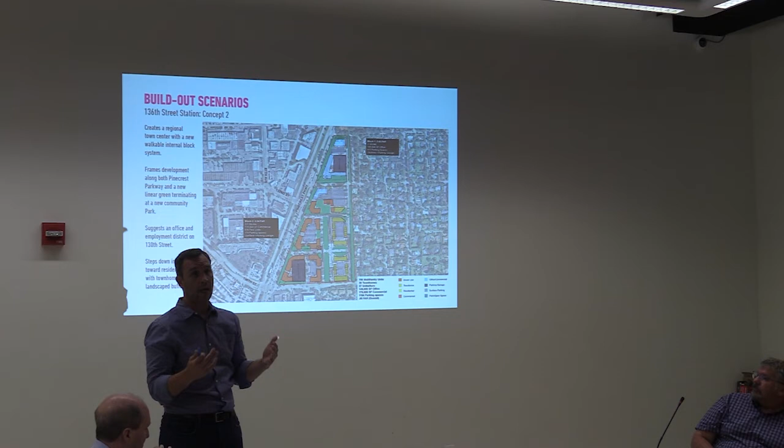We're mindful of that, but again, our focus is a little more focused. We're not doing a full-blown traffic study. I can't tell you what the trip counts are. I can't tell you what the peak times are. That's not part of this exercise.

So let me ask, the question you're bringing up, or the suggestion you're making, that I'm picking up from it, is that there would be an access road that would be for the short-term driver coming in off of the primary.

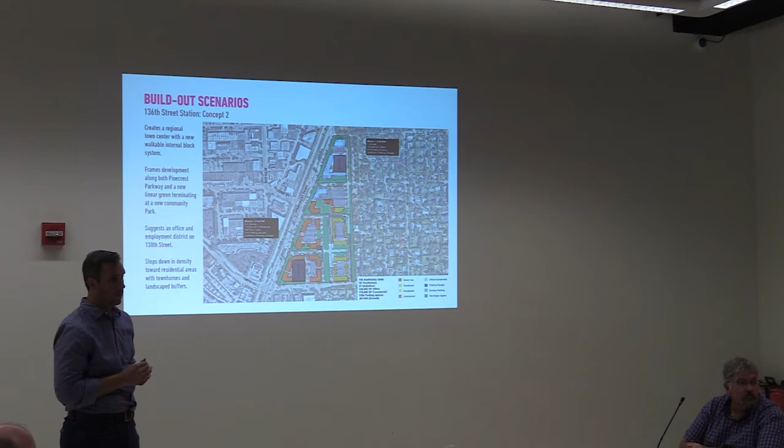So the question to you, Matt. If I took that diagram you do, which is diagrammatic and schematic, you're not proposing it, and for argument's sake, you keep the parts you like - the Home Depot stays in the corner, you dress it up so it looks like part of the complex, and you slide the buildings back where you have a secondary aisle that could allow cars to come in and out from an intersection. Do you think that's manageable? Is that something this type of scheme could do?

It's obviously another scenario, something we could analyze. If Home Depot comes in here, that's going to have an impact. As far as queuing, that's the big concern - cars stacking up, making sure you have enough space. Well, that's what I hear you say.

So when we look at these, the size of our blocks are sized purposely to help alleviate some of those congestion issues, so that when you pull into the property, you're not going to slam right into somebody stopping at a stop sign or get confused about where they're going. The block sizes we show here are best practices for people to get oriented coming into the site. As far as parking and short-term parking, there are many strategies - all these streets have on-street parking, some metered, some signed for short-term parking. If you need to hop into a store for 15 minutes, you park there and you're on your way, you don't have to go into the parking garage.

Many different strategies we can do to help alleviate the transportation. How far forward can you push buildings? I'm saying the opposite - put all the buildings as close to US 1, if not on US 1, and have maybe only exit parts.